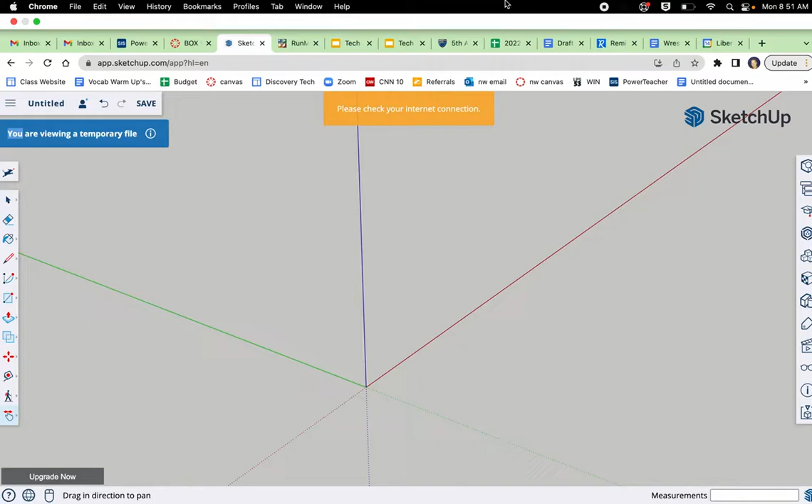Okay, this is the video for the box project, how to draw it on SketchUp. If you want to challenge yourself and not use the video, you have all the information that you need to draw it just on this document that is in modules woodworking. It's got the sizes of everything and all that stuff. But if you want the video, here we go.

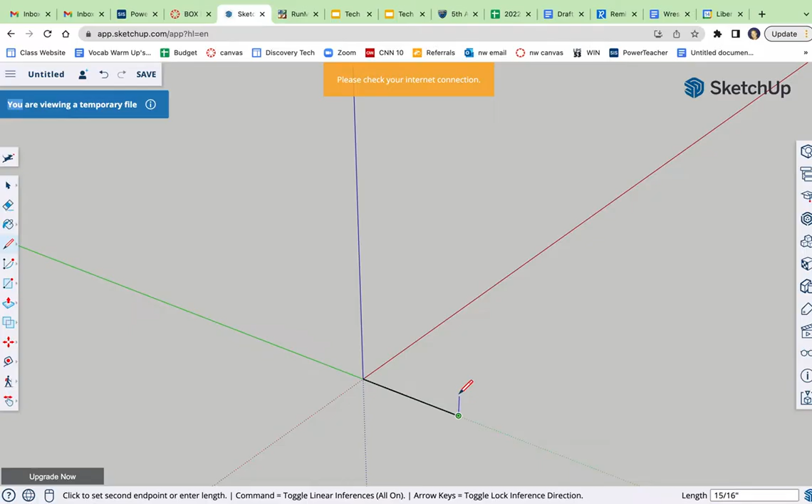So I'm just going to start by drawing a side. So those big sides are 4 3/4 wide, so 4.75 on the green, up the blue 5. I'm gonna go up the blue 5, 4 3/4 on green, 5 on blue. All my boards are 3/4 of an inch thick or 0.75. I'll come back later and put the holes in.

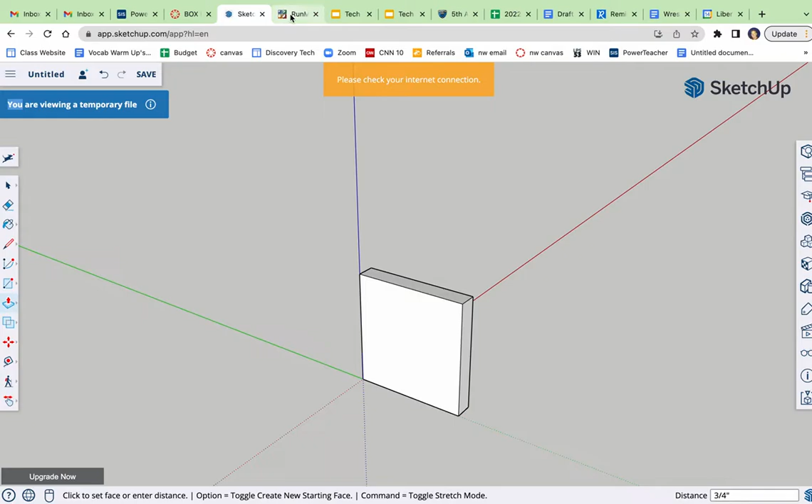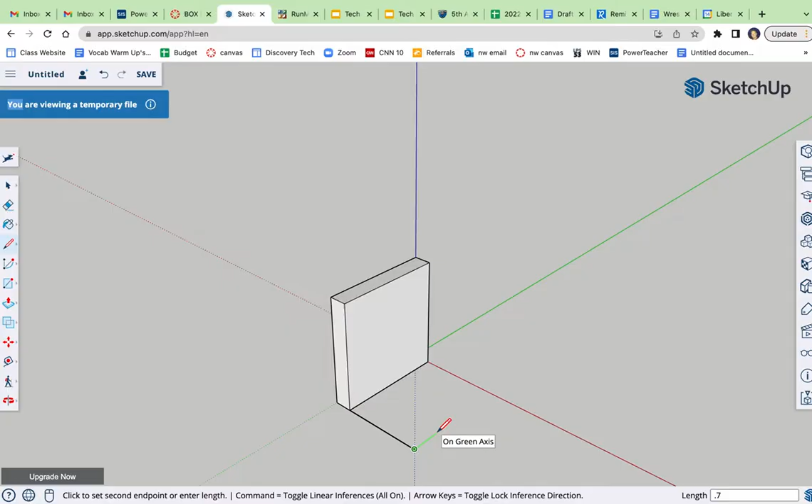Okay, I'm gonna orbit, go from over here. Now I need to draw one of these sides. They are 3.5 wide, 3.5. I'm actually going to draw the bottom and then pull it up. So I'm going to go on the green, 0.75, back to the red, push, pull, up, 5. I'm going to orbit again so I can kind of see it from this angle.

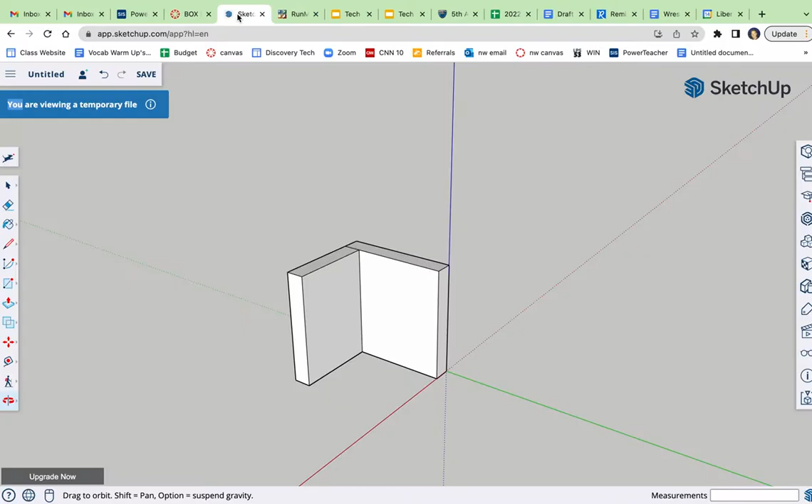I'm going to actually put the bottom piece in. I'm just kind of thinking through this and I feel like that would be easier. So that bottom piece is 3.5 by 3 1/4. So I'm going to come from there along the green 3 1/4 or 3.25, 3.5 on the red, push pull. I said all my boards were 0.75 thick, 3/4 thick. Okay.

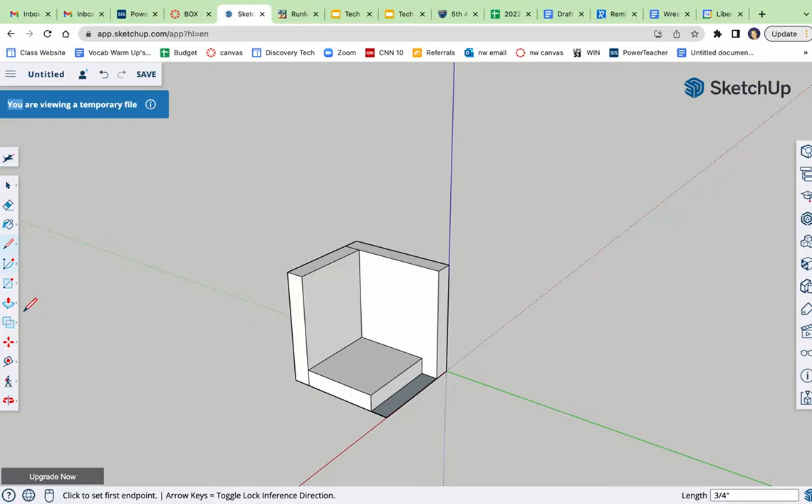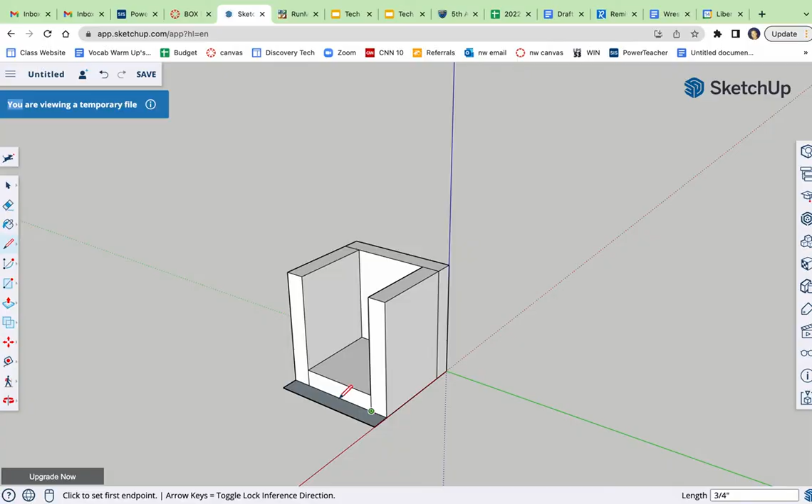Now I'm going to draw the bottom of this board. So 3.5, 0.75 on green, pull that up 5. I'm going to draw the bottom of this last board. Start there, come out on red, 0.75, over on green, 4.75, close the shape, pull that up 5. So there's my main box. Still got to do the lid and put where the holes go, but the box is looking good.

All right, let's do the lid. The lid is 5 by 4 3/4, just like the other pieces. Oops. Trying to think how I want to draw my lid. I don't want to put it on the box, I don't think, because I want to be able to see the detail of the box. I think I'm just going to draw it just kind of over here beside the box, and I'm going to draw it upside down. So I'm just going to start on this corner. You can start anywhere, just randomly. I'm going to come over 2 inches just to get some spacing.

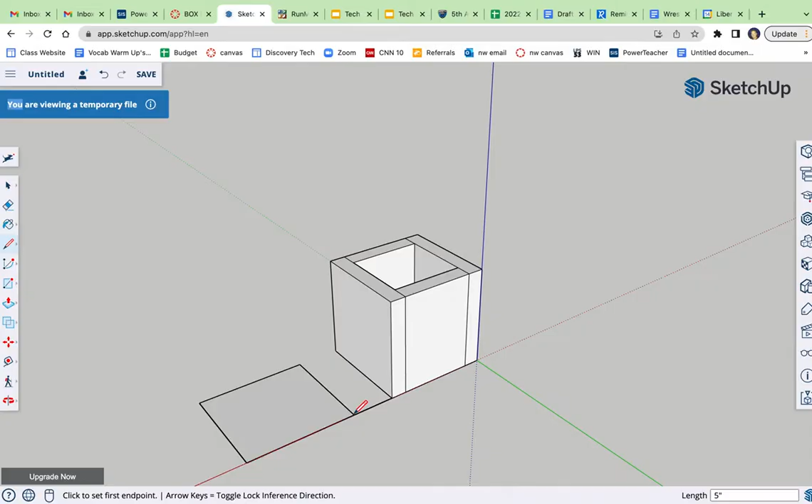So I'm going to go on green, 4.75, over on red, 5, back down on green, 4.75, close the shape, erase that line, push pull up 0.75, and then I need to put the little piece in the middle of it. So basically I just need to come in 0.75 along one edge, find the end point, take it across. Then I'm going to start a new line along that line, come in 0.75, take it across, erase that line.

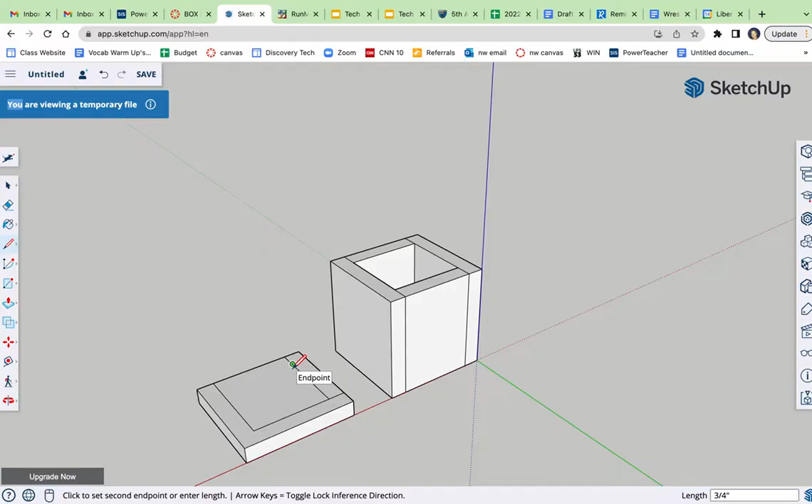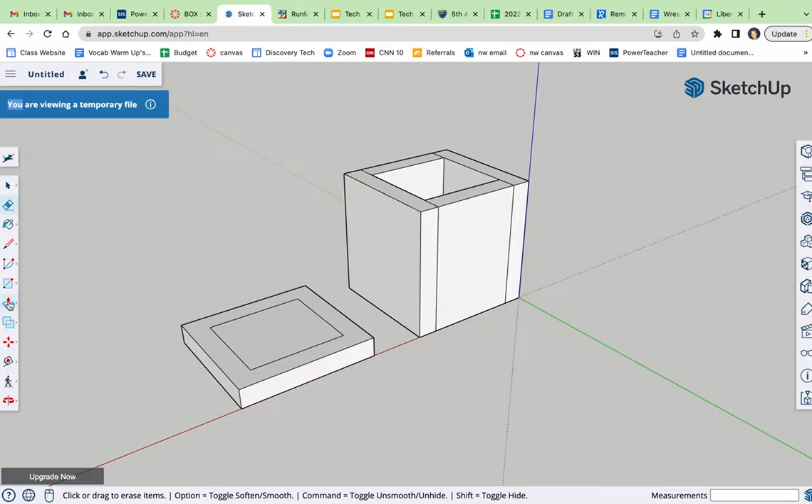I'm just coming in 0.75 from each edge, basically, and making a line there. And then I'm going to erase, oops, zoom in on that. Erase, erase, erase, and push pull that up 0.75. All right, you might want to do your lid differently, but I kind of like it just sitting next to it. That's 2 different pieces.

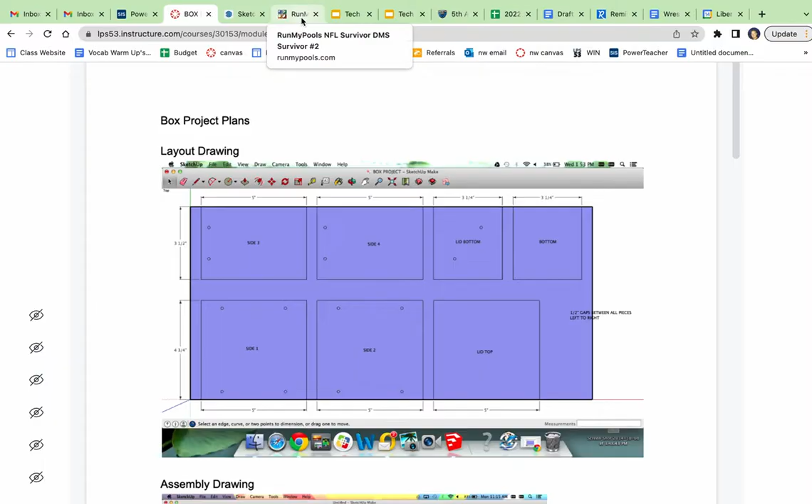All right, now I need to do hole locations. Basically all my holes, I think, are either an inch from an edge or 3/8 from an edge. Those are inch. So that's simple enough. And then I'm going to draw them like counter bores, because that's how I see them. So just kind of orbit, find a good area to work from. I'm going to start in this corner, come in 1, find the end point in 1. Make sure I'm on where I want to be here. Same thing here, in 1, find the end point in 1.

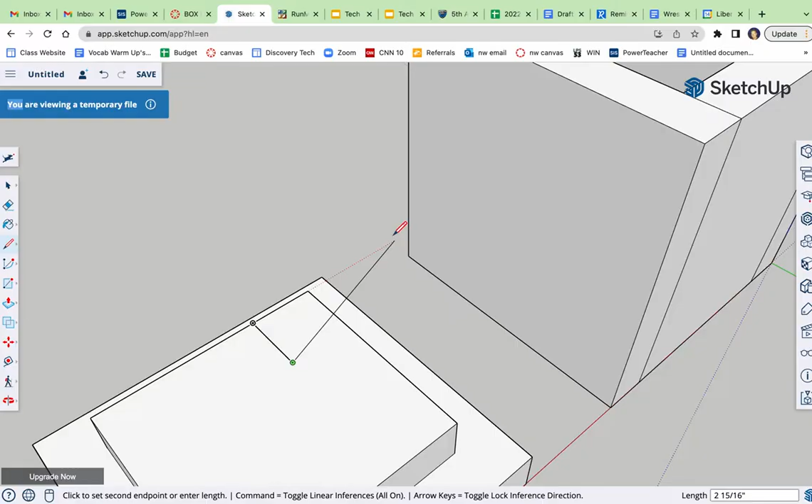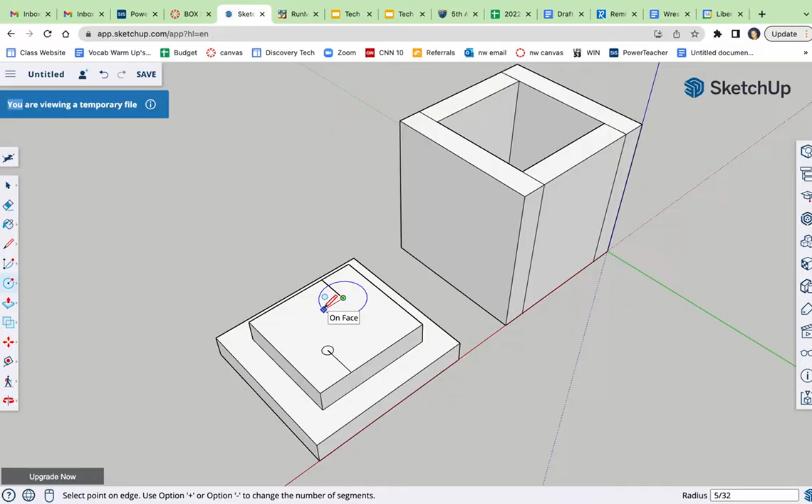I'm going to go circle tool. That's the same as rectangle. Change it. Click. My counter bores are 5/16 diameter. So SketchUp asks for your radius. Radius is half of diameter. To take half of a fraction, you just double the denominator. So I'm going to type 5/32. Come out 5/32. Grab my eraser, clean up the construction lines. Okay, let me work on this face a little bit.

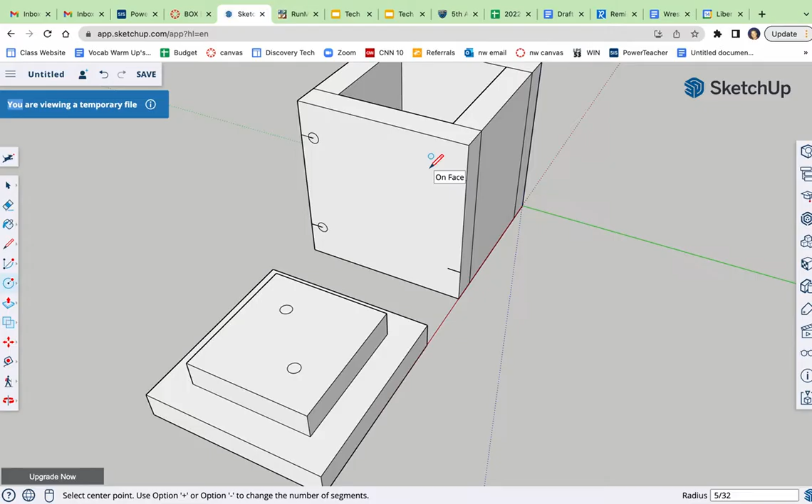I'm going to come up 1, find the end point in 3/8. Escape to let go of the pencil, start a new line, down 1, in 3/8, escape, start a new line, down 1, in 3/8, escape, new line, up 1, in 3/8, enter. Now circle tool, radius 5/32, circle tool, radius 5/32, repeat, grab your eraser, clean it up.

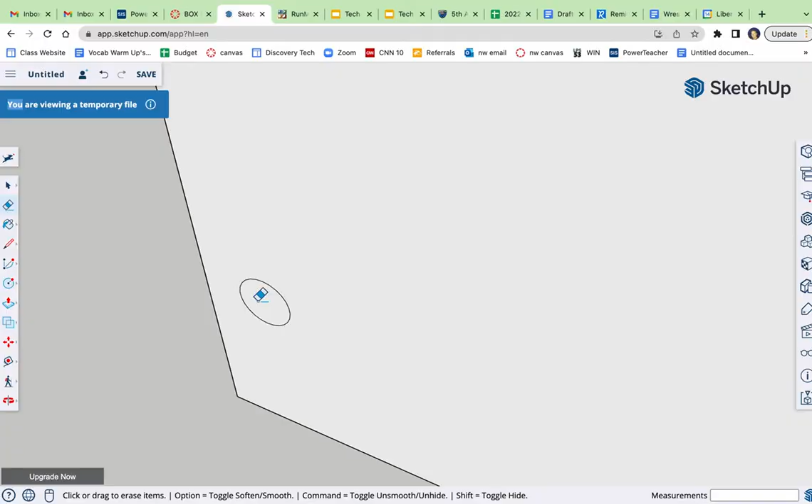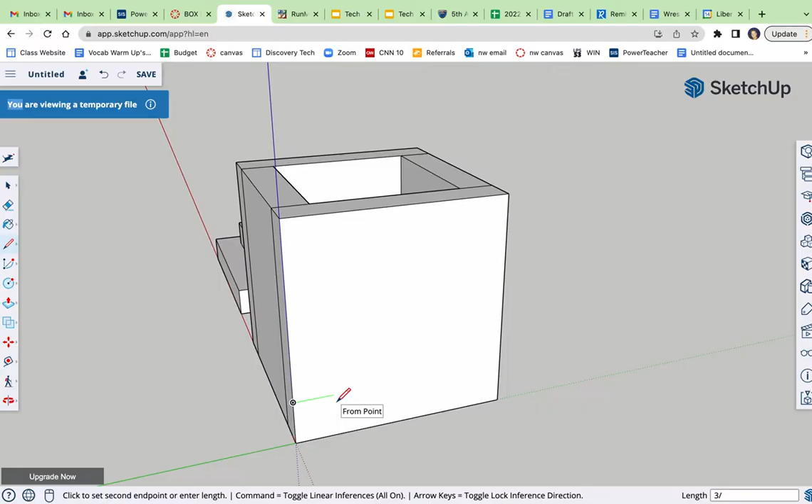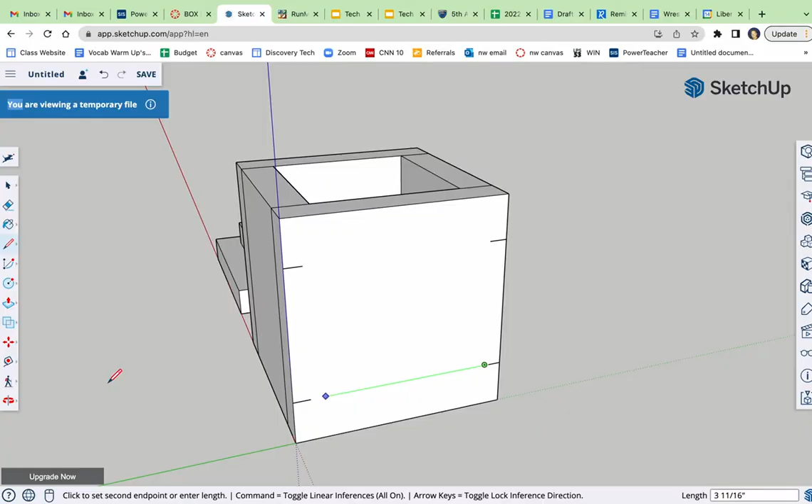Okay, rotate. I'm going to do the exact same thing, or orbit, I'm sorry. Do the same thing on this side. In 1, over 3/8, escape. Repeat that 3 times. Circle tool, out, radius 5/32. Repeat 3 times. Eraser and clean it up.

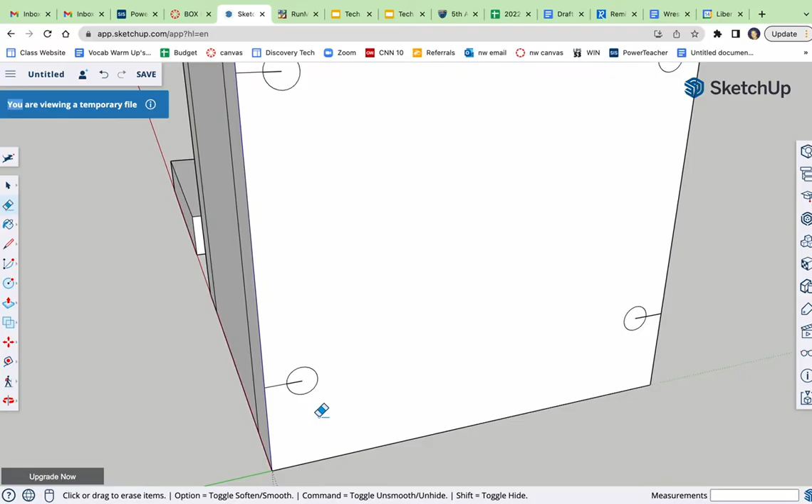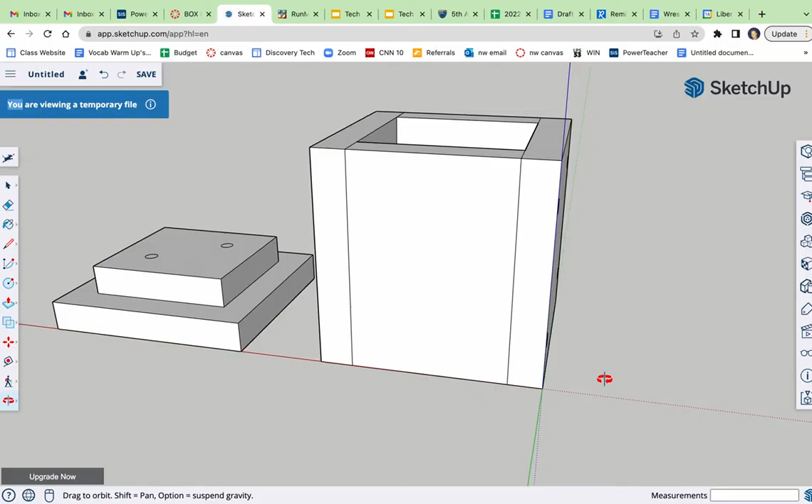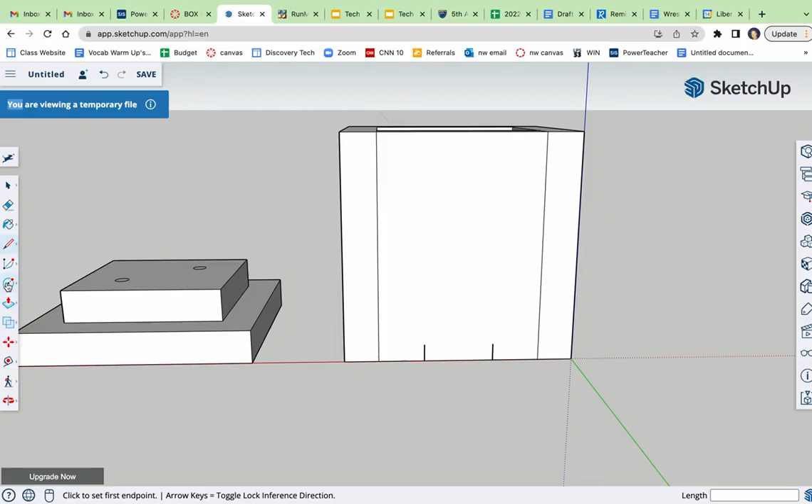Almost done. Rotate, orbit this side. I'm going to start here in 1, up the blue 3/8, escape, same thing from here. Circle tool, radius 5/32. Repeat. Grab your eraser, clean it up, and orbit.

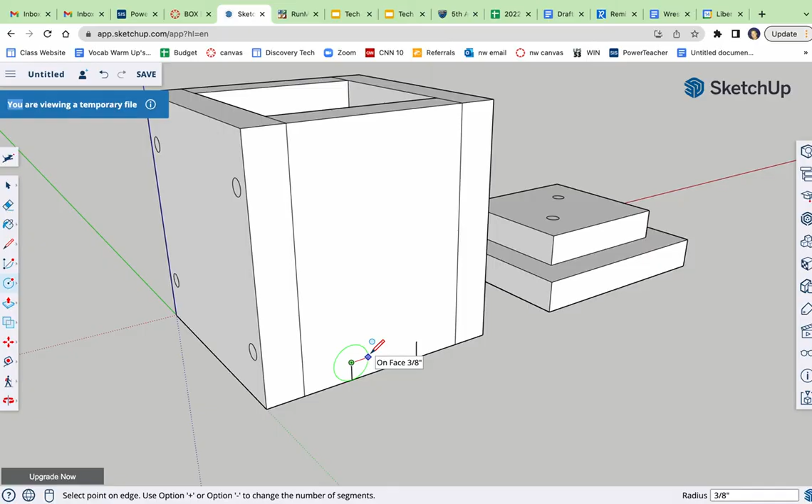Same thing over here. In 1, up 3/8, escape. In 1, oops, up 3/8, circle, radius 5/32. Grab your eraser, clean it up. All right, optional step. If you want to paint bucket everything as wood, you can. I'm not going to.

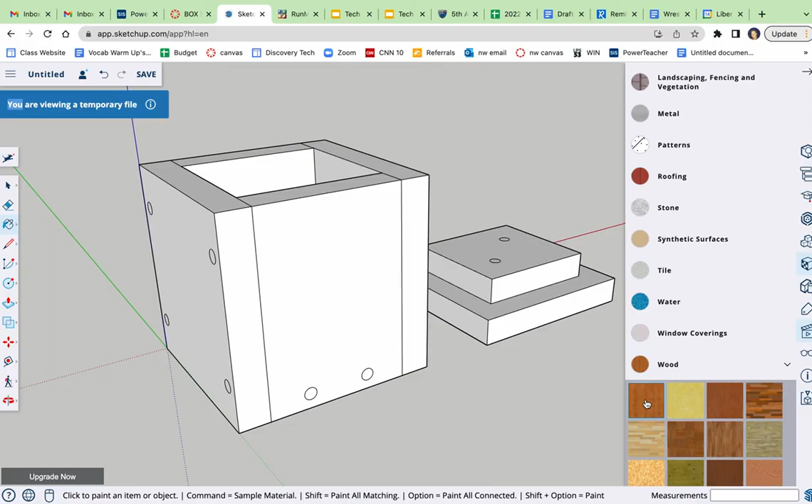All right, take a screenshot of this, put it in your folder, raise your hand, show me that it is in your folder.